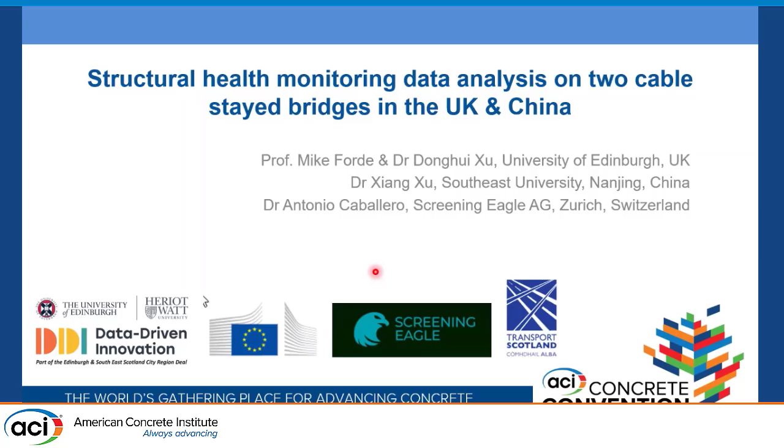Today's presentation is divided into the temperature field analysis on concrete decks and towers, and also traffic-induced deflection predictions using neural network models.

First, some background. Long-span bridges play an important role in modern society. Most were constructed after World War II in North America and Europe. In the US, the American Society of Civil Engineers publishes an infrastructure report card every four years to assess the conditions of all American infrastructure. Their 2021 report revealed that 42% of bridges were over 50 years old, and 7.5% are deemed structurally deficient.

In the UK, the Forth Road Bridge, near Edinburgh, was discovered with truss end link failure in 2015, and combined with other factors like unexpected increases in traffic, this bridge is now replaced by the Queensferry Crossing.

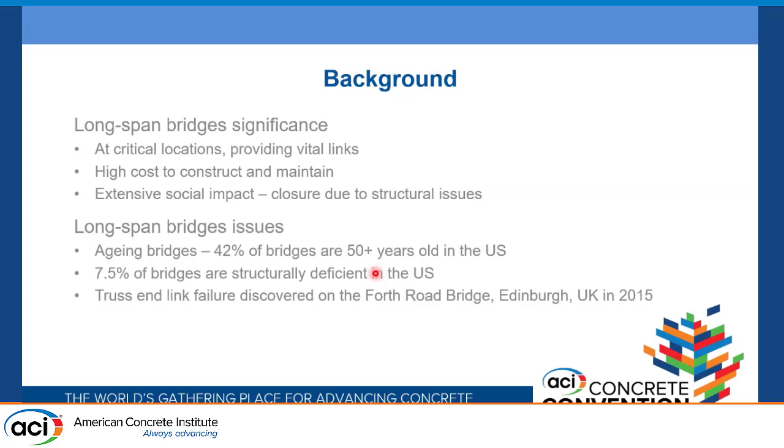Next, I will introduce the research target. The Forth bridges consist of 3 bridges connecting Edinburgh to the south and to the north over the Firth of Forth, which is the estuary north of Edinburgh. Here is the overview of the 3 bridges.

The red bridge is the Forth Bridge, the oldest of the three. It's a cantilever railway bridge, considered one of the symbols of Scotland and also a UNESCO World Heritage Site.

In the middle is the Forth Road Bridge, which opened in the 1960s. It's a suspension bridge, but now it's only open to pedestrians, public transport, and cyclists.

The other traffic is carried by the Queensferry Crossing, a 3-tower cable-stayed bridge with an overall length of 1.7 miles. It now carries the M90 motorway, a very important traffic link over the Forth in the central belt of Scotland. This area has over half the population of Scotland, so this is a very important bridge in Scotland.

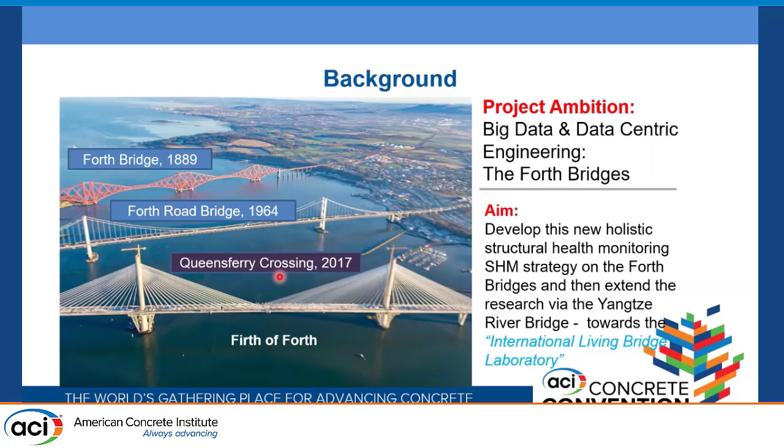Both the Forth Road Bridge and Queensferry Crossing are fitted with a structural health monitoring system, which provides continuous monitoring data about the bridge itself and its environmental and operational conditions.

The bridge in China is the NDB, formerly known as the Third Nanjing Yangtze River Bridge, opened in 2005, which is also a vital transportation link crossing the middle and lower Yangtze River, connecting the city of Nanjing and its Liuhe district. It's a double steel tower cable-stayed bridge with a main span of over 600 meters. A unique feature is its 215-meter height, arch-shaped steel tower, the first of its kind among such long-span bridges.

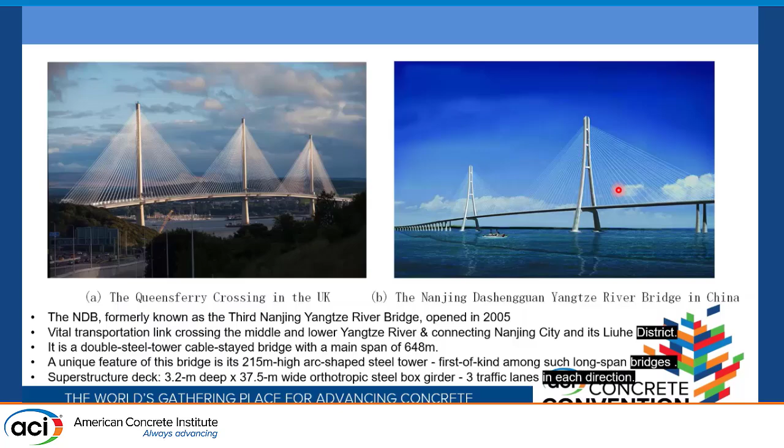When we talk about bridge maintenance, inspections are vital. Bridge inspections can be put into 3 categories: visual inspections, the most comprehensive and normally used reliable method; non-destructive testing, which uses techniques like acoustic emission to assess bridge conditions;

and, what we are talking about today, the structural health monitoring system, which uses various types of sensors, most of them permanently fitted on the structure to provide the condition of the bridge.

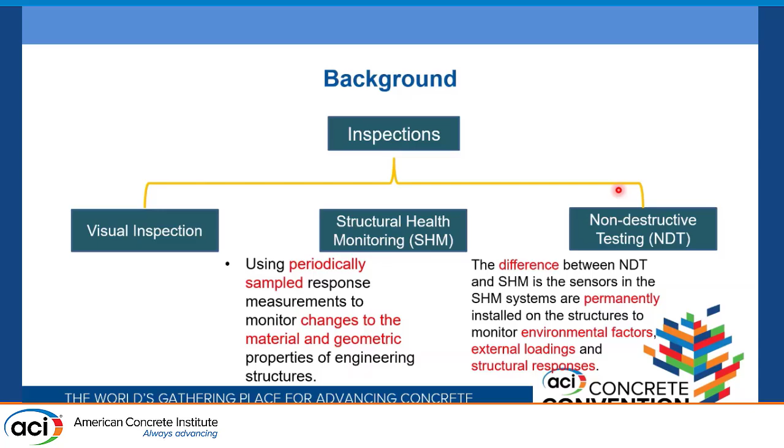Here are some types of sensors installed on the Forth Road Bridge and the Queensferry Crossing. For example, there are about 192 sensors on the Forth Road Bridge and over 2,000 sensors on the Queensferry Crossing.

We can see thermometers to monitor temperature variations on different parts of the bridge, anemometers to give wind speed and direction on the tower, and a dynamic weigh-in-motion system that gives information on passing vehicles. Also, on the bridge itself, there are accelerometers and GPS stations, which give the displacement of the bridge deck, and also strain gauges.

These systems all generate a huge amount of data. For example, 24 gigabytes of data on the Forth Road Bridge and over 200 gigabytes on the Queensferry Crossing.

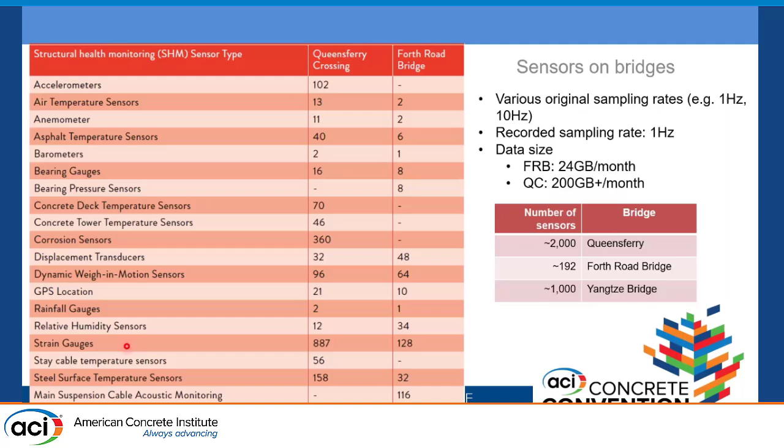Even though different sensors have higher sampling rates, some perhaps 10 Hertz, the recording sampling rates for all sensors are just 1 Hertz to save storage space. However, under extreme weather conditions, the data will be recorded at the sensor's original sampling rate.

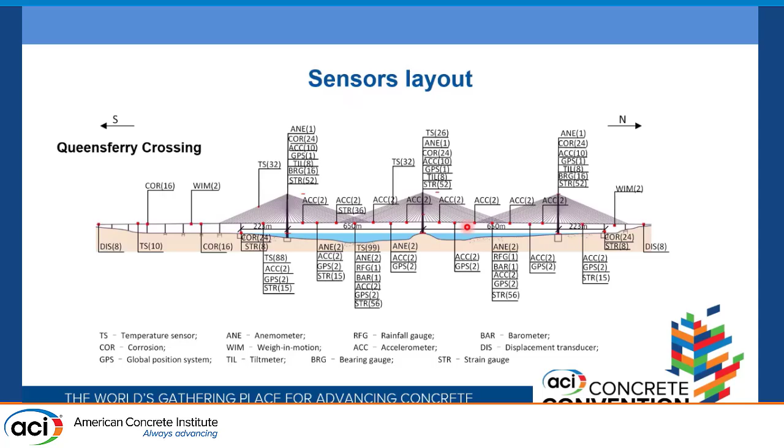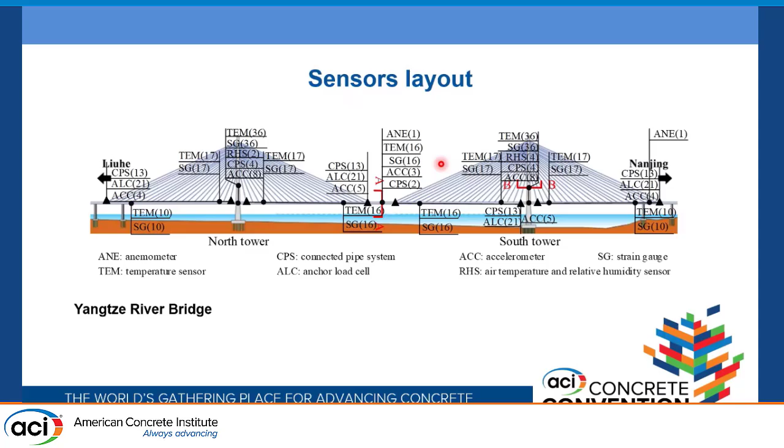On the Yangtze River Bridge, the location of the sensors is similar. However, they are stored at a higher frequency of 10 Hertz due to the smaller number of sensors on the bridge.

First, we investigated the thermal-induced structural response on the Queensferry Crossing. We started by identifying the critical locations on the bridge by applying a unit load on the bridge finite element model using MIDAS. The unit load is specified in the Eurocode as vehicle load model 1.

The sagging and hogging moments are plotted here. For the girder section, we see that several locations have relatively large moments, such as the north and south auxiliary piers, and also on the south and north mid-span. Combined with the sensor layout on the Queensferry Crossing, we actually use the south mid-span section and the tower at mid-height and longest stay cable to study the temperature field.

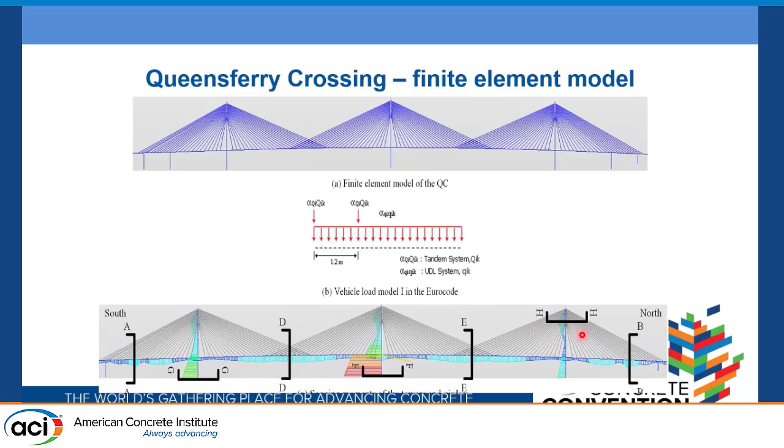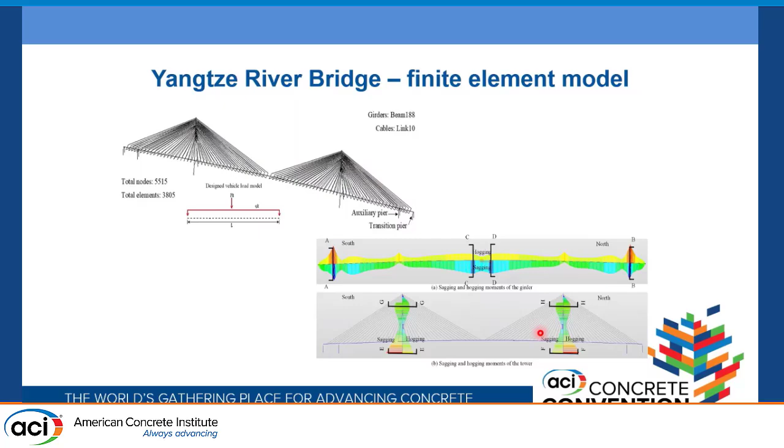Similar approach was used to study the Yangtze River Bridge to identify its critical sections.

Let's first have a look at the temperature field of the concrete deck, which is just on top of the deck section. There are 5 sensors installed in the cross section of the concrete deck. We can see that even for this small thickness, the temperature difference between the top and bottom of the concrete deck is quite large, with the maximum reaching 10 degrees Celsius, and normally it's distributed between 0 and 10 degrees. If we look at this time series plot, we can see that the difference is quite large in the summer months, indicating a strong solar radiation effect on the concrete during that time.

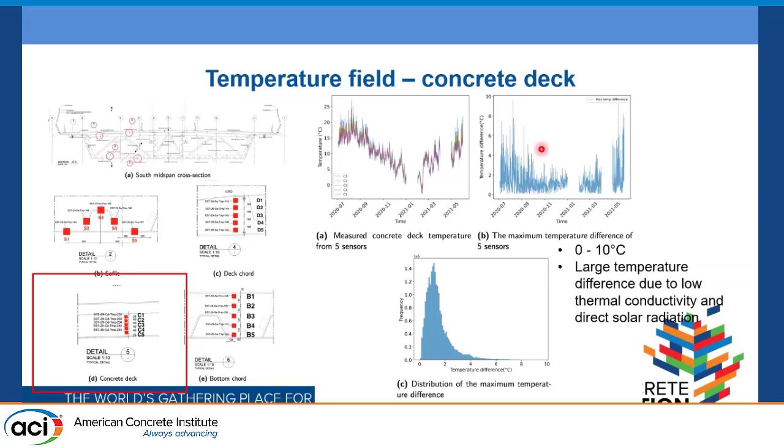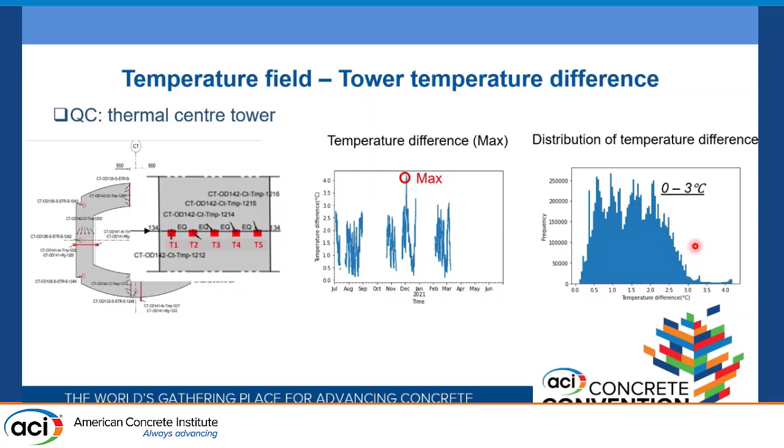Next, the temperature difference between the inner and outer side of the concrete tower was investigated. We were trying to use 1 year of data, but there was some data loss problem for the sensors on the tower, so you can see these large gaps. Also, the maximum temperature difference is 4 degrees. Most of them are only between 0 to 3, so it's smaller than the concrete deck.

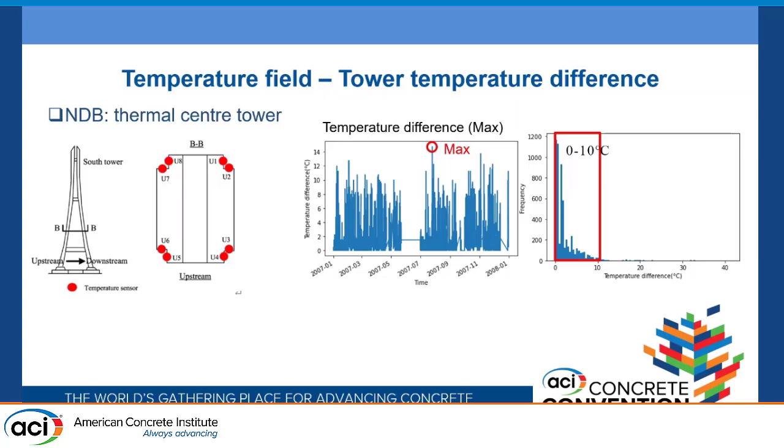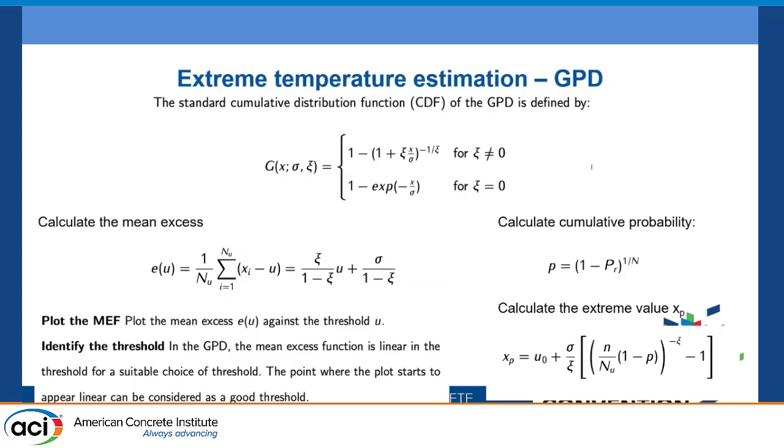With the information of 1 year of temperature difference, we can make estimations of the extreme temperatures for the next 120 years using this data. It's very important to verify the extreme temperature difference using the actual monitor data against the design code. Here, we used a method called generalized Pareto distribution, GPD. GPD is used to model the tail of another distribution, for example, normal distribution. This method is widely used in extreme value estimation.

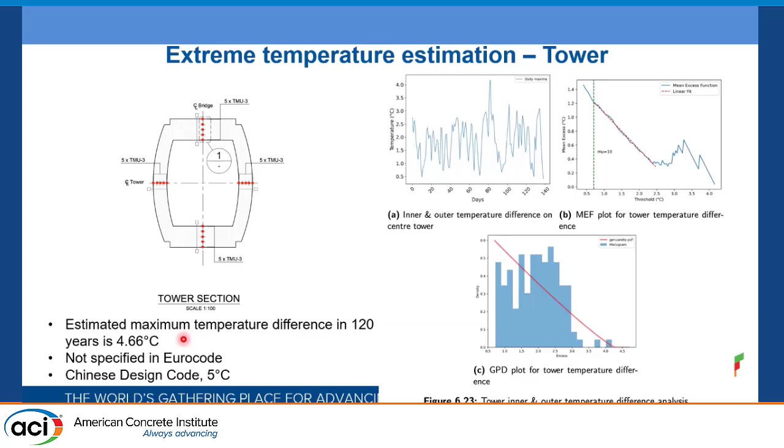And my colleague Sean Shu was conducting similar research for the Yangtze River Bridge. In his research, it's actually discovered that from the monitor data, the estimation is actually larger than the Chinese design code.

Next, we are investigating the thermal deflection relationship with neural networks. This plot gives the raw data of the displacement, vertical displacement of the midspan, and one of the temperature sensor readings from the deck. We can see that the displacement oscillates at a high frequency compared with temperature. That is because the displacement is due to a combination of both temperature effects and dynamic loads, for example, from vehicle and winds. So therefore, it's necessary to separate these dynamic load effects from the displacement measurements.

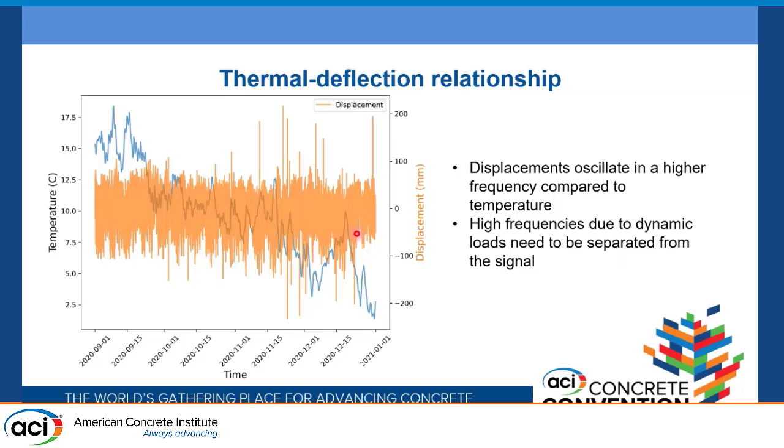Here we use the wavelet transform to decompose the displacement signal. Here is the decomposed data. We can set the high frequencies to 0 and then reconstruct the signal, so only the low frequencies will remain in this procedure. For example, here are some comparisons of the reconstructed displacement data in the black line.

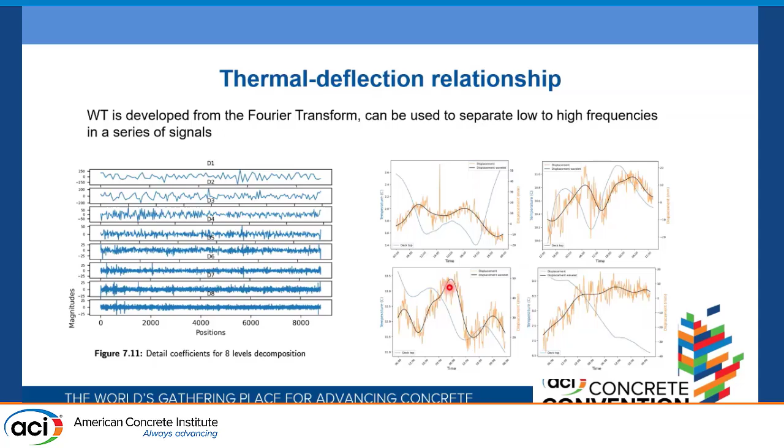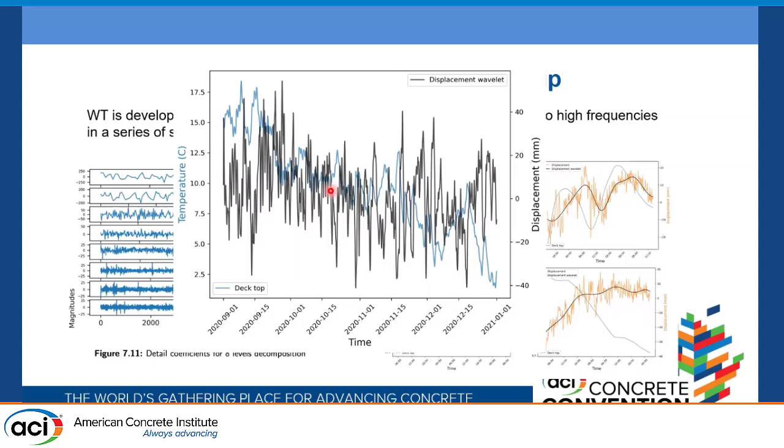And when we compare the temperature and displacement, there is a quite strong correlation between them. But also a noticeable time lag exists between them, indicating that the impact of temperature changes on the bridge displacement does not occur instantly. Furthermore, this time lag is not a constant value. This is the reconstructed displacement data using the wavelet transform and the temperature recordings.

Next, we use a neural network model called the long short-term memory to map the relationship between temperatures and midspan deflections. Temperature readings are from both steel and concrete deck, and both ends of the cables, which serve as the input to the neural network. And we use the wavelet transformed GPS data as the output. The results show that the LSTM, long short-term memory, is able to map the thermal deflection relationship, even though there is a time lag between them.

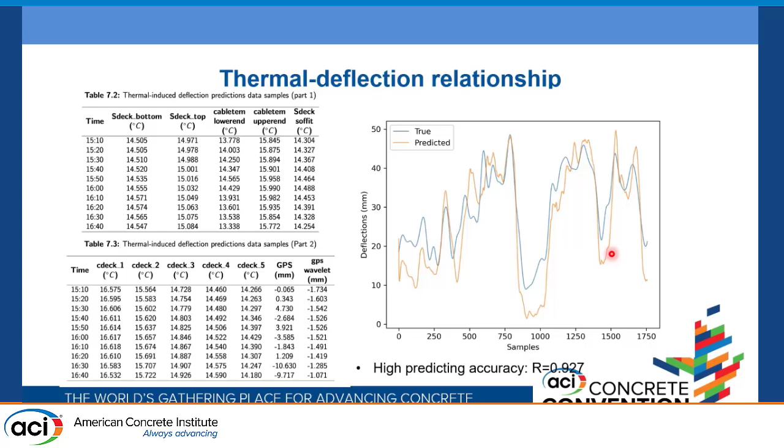Next, let's discuss traffic-induced deflections. This figure shows the average traffic flow daily variation on an hourly basis according to a document from Transport Scotland. The southbound traffic travels towards the city of Edinburgh, so we can see two peaks in number of vehicles.

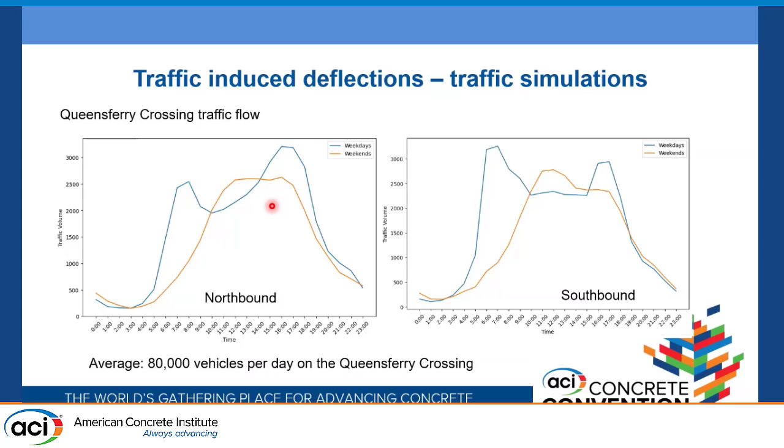These peaks correspond to the morning and evening rush hour. For southbound traffic, the morning rush hour is slightly busier than northbound because people are traveling to the city for business and work. The evening is the opposite, with northbound being busier. On average, there are 80,000 vehicles passing the bridge daily.

The dynamic weigh-in-motion system is installed at the bridge entrance and exits. This table shows some examples of data from the system. We can see the number of axles of passing vehicles, the length of each vehicle, the speed, and also the gross weight.

However, there is a problem with this system. At the time we inspected the data, it could not record every vehicle passing the bridge, but the issue is believed to be resolved by now. By that time, only roughly 10% of passing vehicles were recorded.

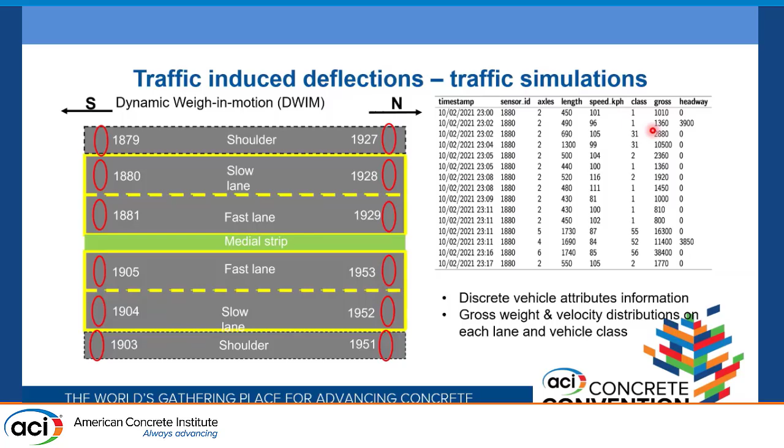Therefore, we proposed a method to simulate passing vehicles on the bridge by using the traffic volume and vehicle attributes like speed and gross weight.

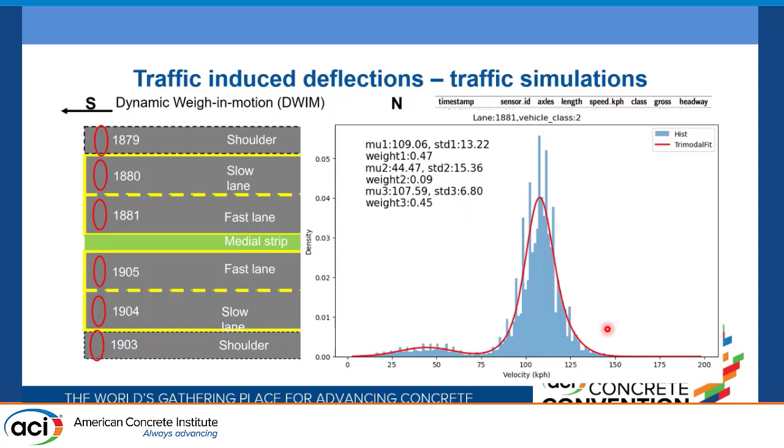With this trimodal fit, we can generate a fleet of vehicles.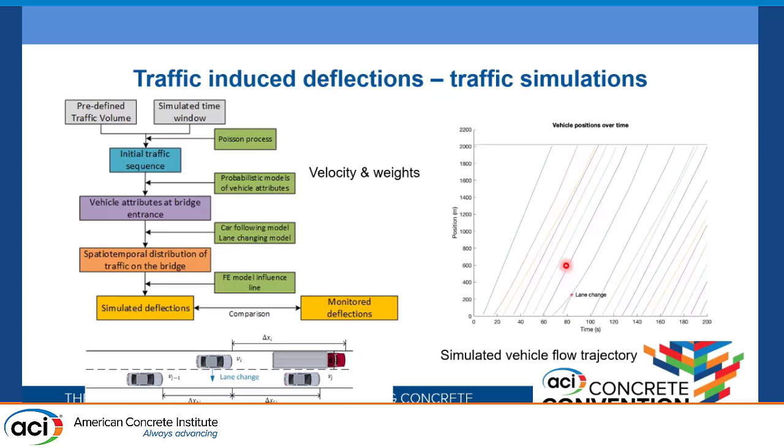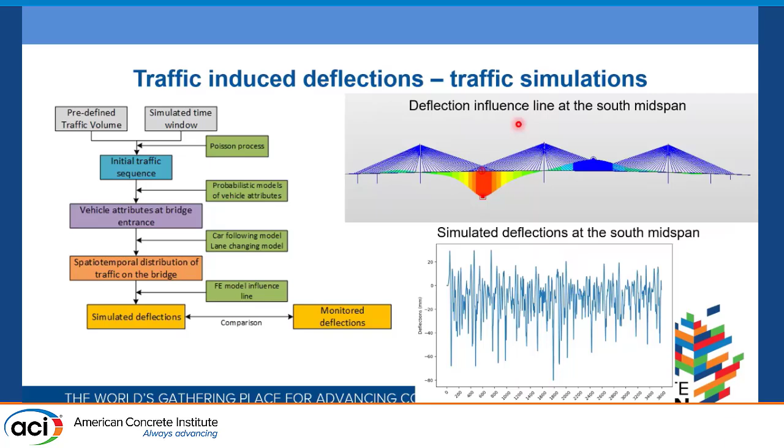Then we can obtain the simulated deflection at the south mid-span using the influence line from the finite element model.

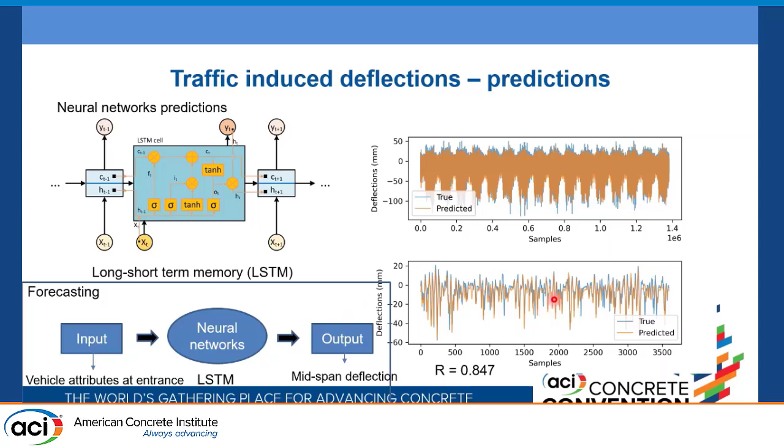With these simulated deflections, we can also use neural network models to make predictions. We used vehicle attributes at the entrance as the input, and the mid-span deflections as the output. We can see that the predictions are very accurate.

So the conclusion is that temperature difference should be considered in analysis for concrete sections. The extreme temperature difference analysis reveals that the extreme estimation for bridge tower thermal load is close to the Chinese design code. Therefore, a revision for the Eurocode is necessary.

LSTM is efficient in mapping both the relationship between temperature and deflection, and the vehicle attributes and deflection in the middle span.

Yes, that's a very good comment and question. I agree, there is climate change and things like that. The standard practice is based on 1 year of monitoring data, but there is research to use perhaps 10 years of past data. In that case, I think there would be a trend indicating climate change and temperature rise. So yes, I agree, if you use a longer time of data, the prediction would be more accurate. Thank you very much.